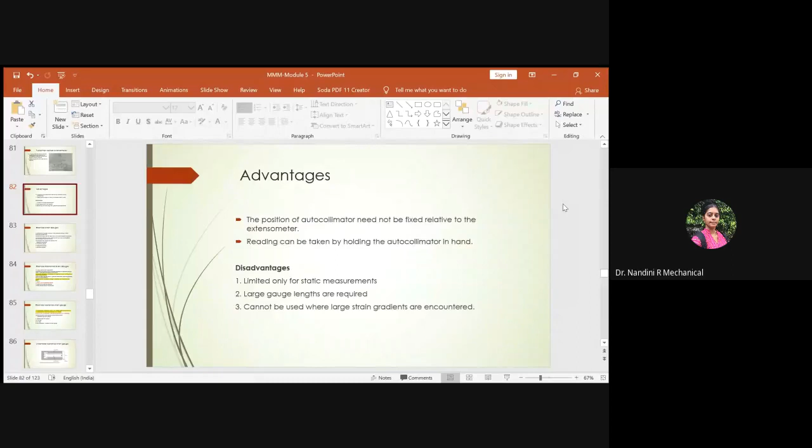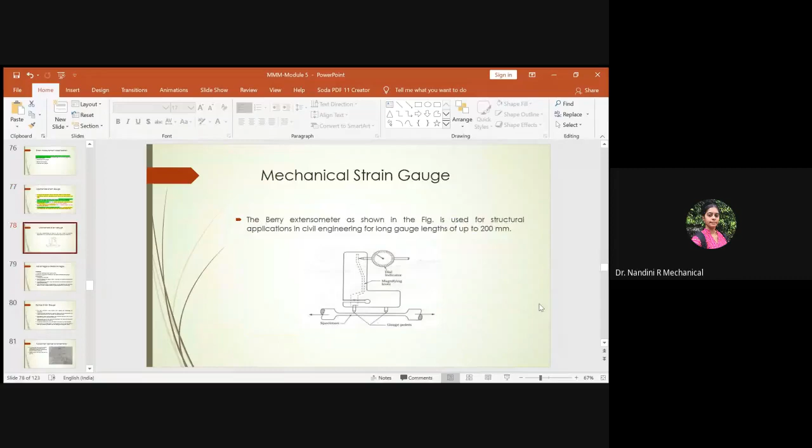In the last session we were dealing with strain measurements. We dealt with different instruments used to measure strain, its classification, and we also went on to electrical strain gauges, its classification based on bonded and unbonded methods. The last part of its classification, piezo-resistive strain gauges, was left out. So today we'll start with the remaining part of the strain measurement section of module five. Related to strain measurements, we have covered what strain is, strain measurements, classifications, advantages and disadvantages.

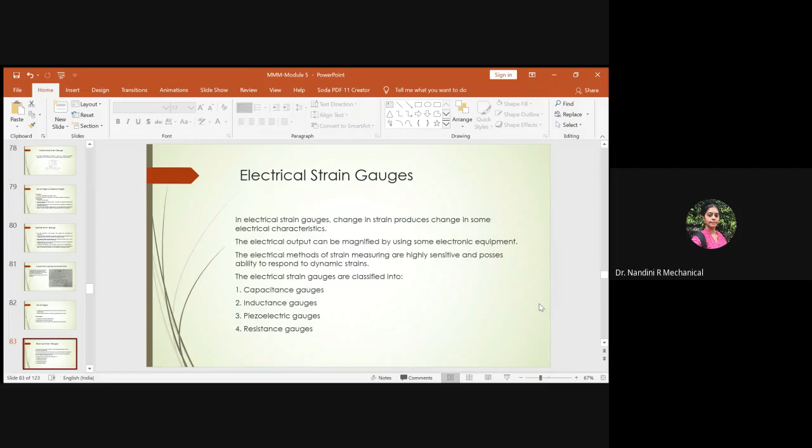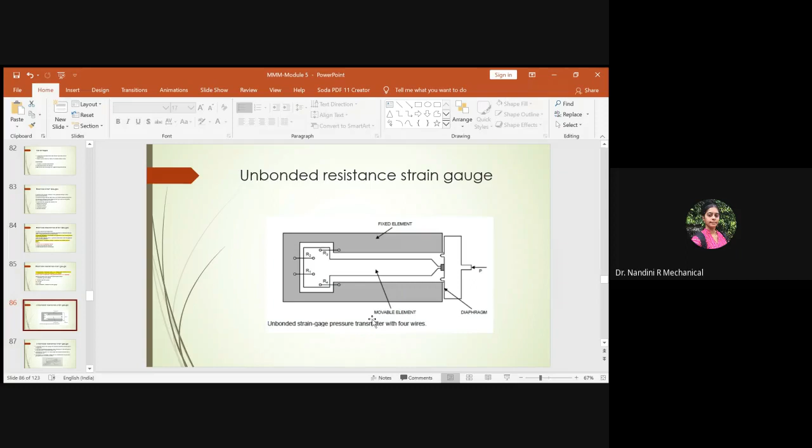Then we dealt specifically with electrical strain gauges, and went on with its classifications. In your syllabus, you have an in-depth description of electrical type resistance strain gauges. So we covered what electrical strain gauges are, how they look, how they operate, and their classifications. We were held up on the last type of classification, which is our semiconductor or piezo-resistive strain gauge. We have dealt with how the structure looks in the unbonded type, how it is operated, and with respect to the bonded type we had two classifications: the wire and the foil method. So that was discussed - this is the foil type which is done.

Now we have to focus on the semiconductor gauge, also called the piezo-resistive strain gauge. If it is piezoelectric, it becomes a dielectric material. If it is piezo-resistive, it comes into the category of semiconductor. Hence the dual name, either semiconductor or piezo-resistive. So piezo-resistive and piezoelectric are both different - they come into two huge classifications, which are semiconductor and dielectric. Here we are just focusing on the piezo-resistive strain gauge, which is also called the semiconductor strain gauge.

These piezo-resistive or semiconductor gauges are usually formed by etching out from single crystals of either silicon or germanium. Both silicon and germanium are semiconductor materials. These are etched out through a single crystal of silicon to get the piezo-resistive strain gauge in the form of thin films. If it is in bulk, with a multi-lattice structure, then it will not be a single crystal - single orientation of the lattice will not be available in that case. Since it is a single structure, we are focusing here on semiconductor gauges of thin film or foil kind of structure.

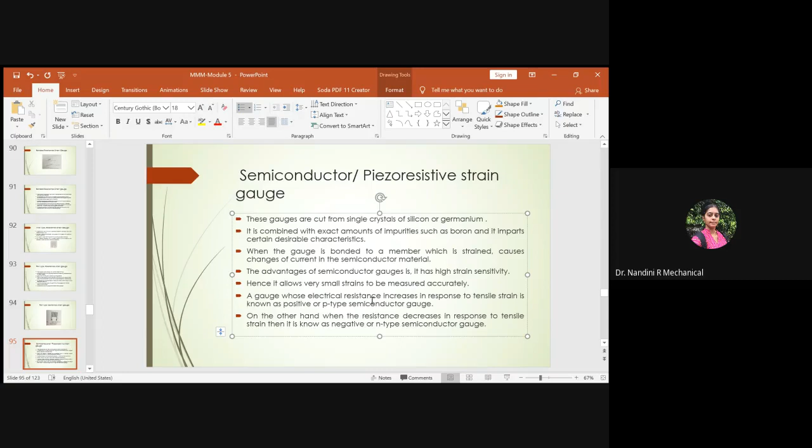There will be some configurations related to the dimensions we have to use. Usually a semiconductor gauge consists of a rectangular filament, as shown in the figure, made by using either silicon or germanium. It will be having 0.05 mm thickness and 0.25 mm width. This is the specification it has to follow for a semiconductor gauge of rectangular filament.

Along with it, the length of the semiconductor gauge can vary from 1.5 to 12 mm, based on the requirement and functionality characteristics. You can select the semiconductor strain gauge of different lengths as per the requirement.

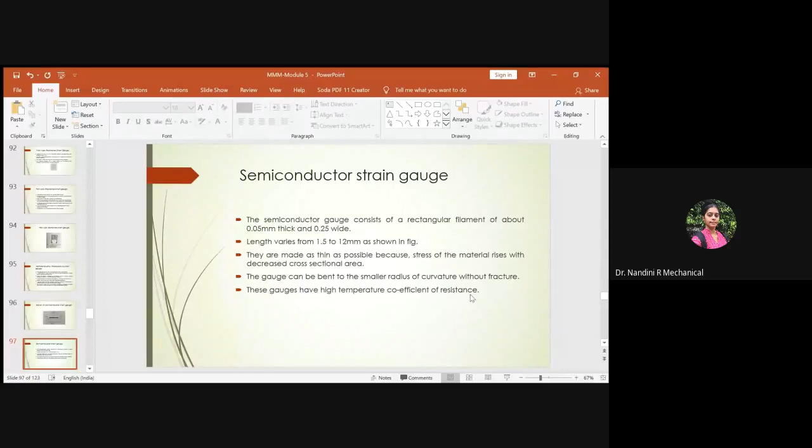Due to this thin thickness, the gauge can be bent to a smaller radius of curvature without fracture. These semiconducting materials are flexible and can be bent to the smallest radius of curvature without fracture because they are not brittle in nature. This is one characteristic of a semiconducting strain gauge. Also, these gauges are very suitable for high temperature coefficient of resistance measurement. So these are the important characteristics of a semiconductor strain gauge and how it is operated.

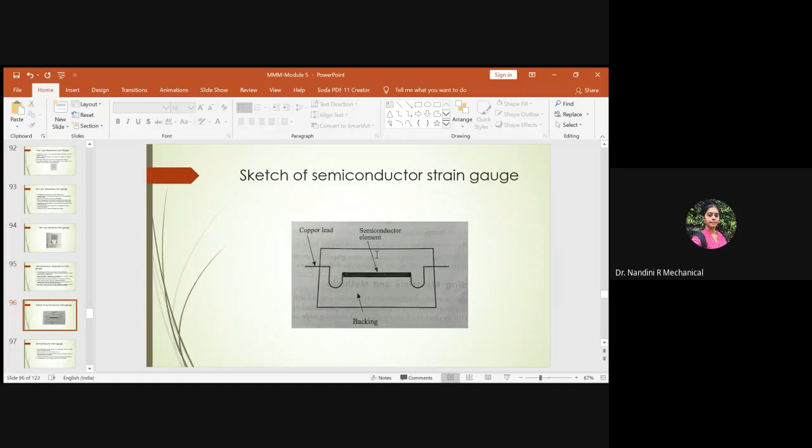Apart from that, there are a few disadvantages to speak about. The first one is the output of the gauge is non-linear with strain, meaning the output you get from the gauge has a non-linear characteristic curve. The response for the given strain in the output electrical signal does not vary linearly; it is non-linear, and could even be exponential. It depends on how the output is revealed for the given input strain. This is one disadvantage, that it is not linearly variable.

And a second disadvantage is that the strain sensitivity is dependent on temperature.

You cannot say the sensitivity of the strain gauge at room temperature will be the same as the sensitivity as temperature increases, because it directly depends upon the external temperature where the device is kept. Hence the strain factor is not an independent variable; it is a dependent variable in semiconductor strain gauges. This is one drawback, because you should be aware of the room temperature and the temperature enhancement, as the strain varies with temperature increase. So this is one of the disadvantages.

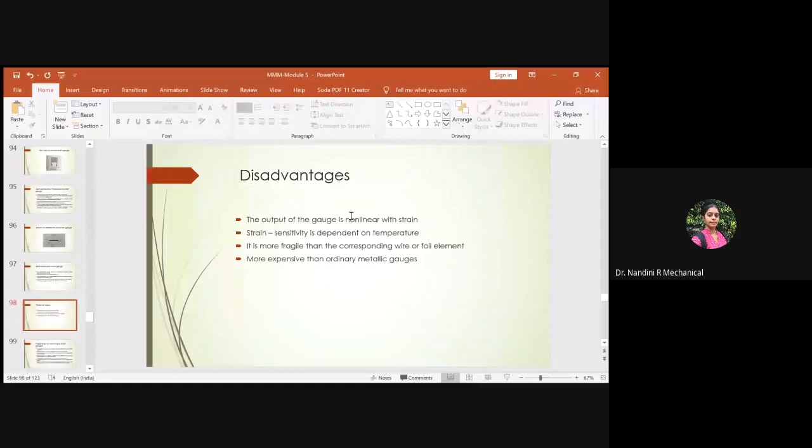After knowing the concept of semiconductor strain gauges, you should understand how preparation and mounting of a strain gauge actually takes place. What are the steps to be followed? We have a few steps, and one has to strictly follow and abide by the rules and regulations of the procedure so that you get a well packaged strain gauge device.

The first step is that the surface on which the strain gauge has to be mounted should be cleaned properly. The strain gauge would be embedded on a movable platform, or embedded on a foil, or embedded on wire, as you have studied with the wire or foil method. So the surface on which the strain gauge has to be embedded or mounted has to be cleaned properly.

Second, if there are any traces of grease or oil on the surface, it should be cleaned using acetone. This helps clear any grease, oil, or impurities present on the surface where the strain gauge has to be mounted, because it should not create voids or impurities embedded between the surface and the strain gauge. If that happens, proper adhesion or bonding will not take place. So it must be cleaned using acetone.

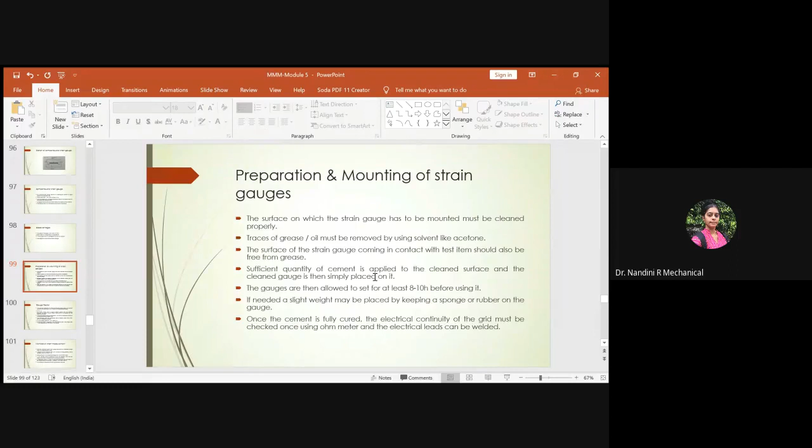So then you should come to know what is meant by gauge factor. We studied this in depth in the theory part of our strain gauge experiment, around a 1.5 hour class where I explained all the concepts related to it in brief. This is just a brushing up in the fifth module, but let us still focus on the gauge factor and what it means.

I have already told you that the change in resistance to the change in length provides us the gauge factor. The electrical resistance of a metallic conductor usually varies directly with respect to its resistivity and length, but it is inversely proportional to the cross-sectional area. So we have the equation: electrical resistance equals rho L by A, where rho is the resistivity factor, L is the length, and A is the cross-sectional area of the metallic conductor being used.

To measure electrical resistance, we always use a metallic conductor. In the metallic conductor, what is the resistivity factor? What is the length of the conducting material we are using, and what is its cross-sectional area? Based on these parameters, we evaluate the electrical resistance of the given metallic conductor.

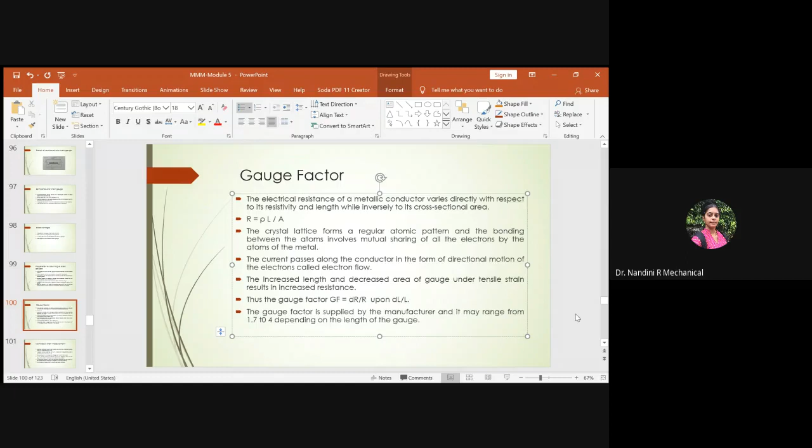This gauge factor we will not compute ourselves; it is supplied by the manufacturer, and usually lies between 1.7 and 4, depending on the length of the gauge being used. We also spoke about the length of the gauge material, which varies from minimum to maximum. Based on this length, the gauge factor keeps varying, and it also purely depends upon the electrical resistance of the metallic conductor used. So based on the variation in electrical resistance and in length of the gauge, the gauge factor is provided by the supplier, and this value mainly depends on the length of the gauge being used. This is about the gauge factor.

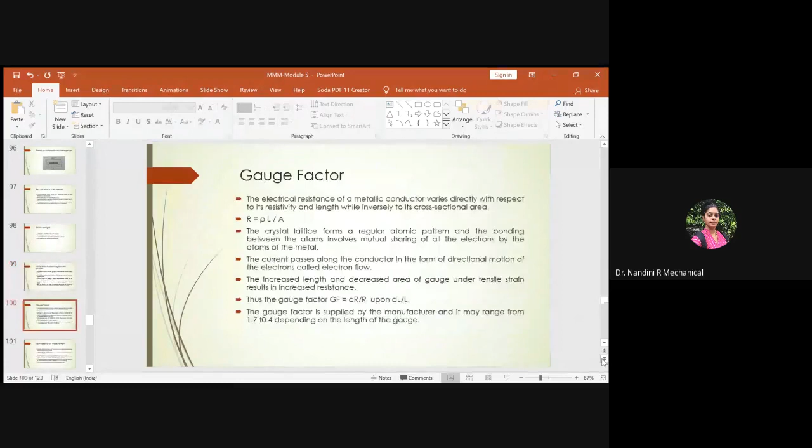Once you are aware of strain gauge preparation methods and the gauge factor, you should also know the methods used to measure strain. Usually we follow two: the null method and the deflection method, which we have already dealt with in our experiments. So we are again telling the same stories.

An electrical resistance type strain gauge usually uses a sensitive Wheatstone bridge circuit for measurement of strain. We have already explained what a Wheatstone bridge circuit is, having four resistor arms, how you balance it at the null position, and how varying one of the resistances gives you the variation measured by the deflection method. So all that has been done.

So the same thing: in order to measure strain, we use a Wheatstone bridge circuit, consisting of four resistive arms with a source of energy. These resistive arms are connected to a battery and a meter to show the readings, as shown in the figure you have already seen in the sketch, where four resisting arms are connected to a meter with a source of energy, our battery, and current flows through the resistor arms.

For balancing, we will balance and get the null position. The basic principle of the bridge can be divided into 2 categories: one is the null method, another is the deflection method.

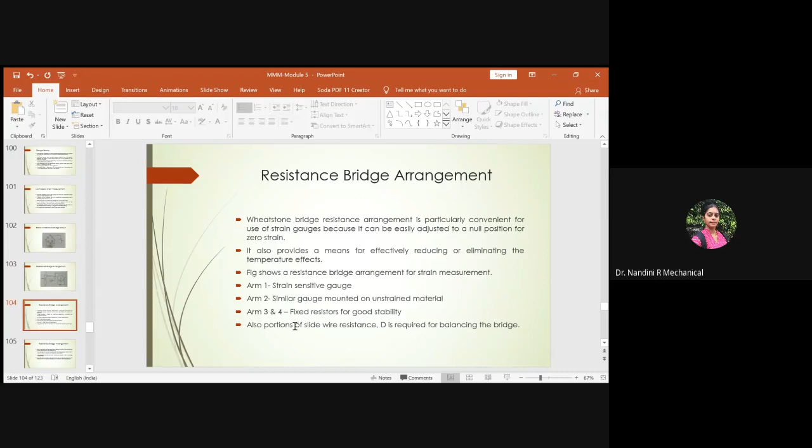In case of the deflection method, continuous readings are taken from one change of strain to another without rebalancing. In this resistance bridge arrangement, we won't keep balancing at every stage, because due to the strained and unstrained arms there will be variation in values and it will not be balanced. As a result, we go on with the deflection method and take the readings. This is convenient compared to the other method, but it is less accurate since the bridge output tends to non-linearity, so the strain obtained is not varied linearly.

The output we get is a non-linear variation with respect to the strain, and as a result, it won't be very accurate readings. But it is more convenient because every time there is no need of balancing it, hence it is called a convenient method. Since it cannot give linearly variable output signals, it is not very accurate, and as a result, as the strain increases or decreases, it keeps on varying depending upon the non-linearity factors associated with this kind of bridge.

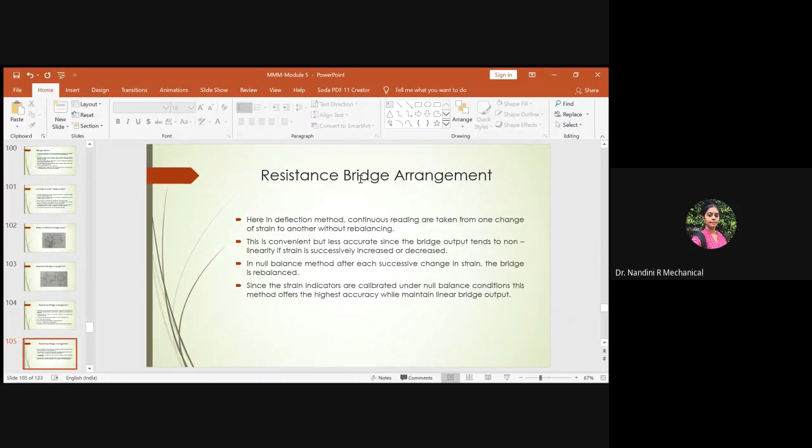So that's what I told you. In resistance bridge arrangement, you have two arms for the resistors, one for the strained strain gauge and the other for the unstrained strain gauge. Due to the strained and unstrained strain gauges, you will not have a null position, and hence you take the readings of the variations in the indicator without balancing. This is the deflection method.

Similarly, if you want to opt for null balance under the resistance bridge, you always keep doing the balancing of the bridge before taking the reading, where you get more precise and accurate results which vary linearly. Whereas in the deflection method, you will have a non-linear variation for the strain response. So based on the requirement and the accuracy needed, you can go ahead with either the null method or the deflection method, even under the resistance bridge arrangement.

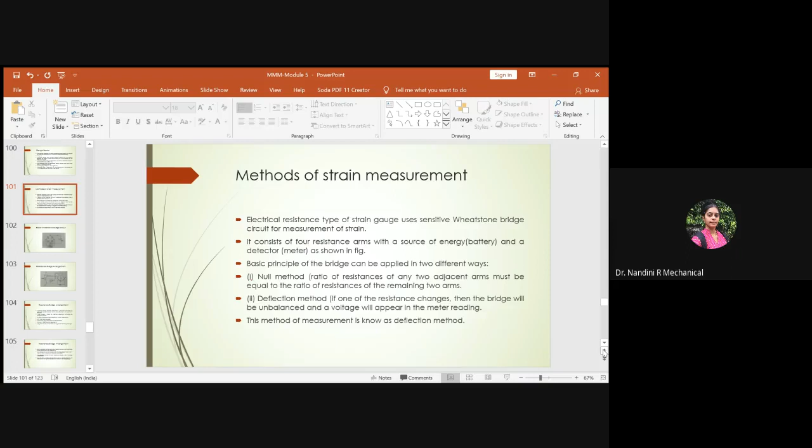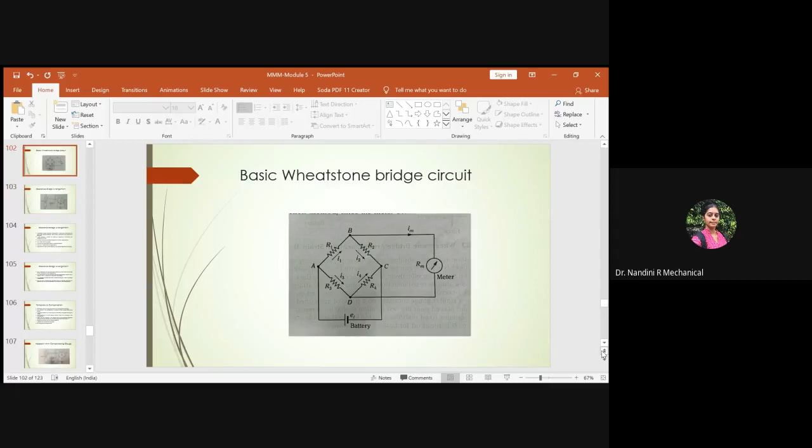In a normal Wheatstone bridge arrangement, you have 4 normal legs of resistors R1, R2, R3, R4, whereas in the resistance bridge arrangement, 2 legs of resistors are removed and replaced with strain gauges, one with strained material and the other with unstrained material. But in both cases, you can measure the output signal under the null method and the deflection method. So if they ask you to explain strain measurement methods, you have to speak about both methods, how it is measured under null condition and deflection condition, along with the sketches you have to draw. So this is about the resistance bridge arrangement and Wheatstone bridge circuit used to measure strain.

And then you should understand what happens in case of temperature compensation, how it varies with respect to temperature parameters.

So now we have studied resistance type strain gauges, and how they are affected with respect to external temperature. One thing to keep in mind: resistance type strain gauges are very sensitive to temperature changes, so any variation in temperature will directly influence the strain gauge readings. There are 3 factors in which it gets varied. The first one is the gauge factor of the strain gauge, which is affected by temperature owing to creep. Due to the creep nature of the conducting material, the temperature penetrates into the material by the formation of creep, and due to that, there will be variation in the strain and variation in the gauge factor measured by the strain gauge.

While explaining the gauge factor, I told you it also gets affected with respect to the external environment, so the strain we are measuring is directly affected by the external environment. It is not independent of temperature, as I told you at that time. The same has been replicated here in temperature compensation.

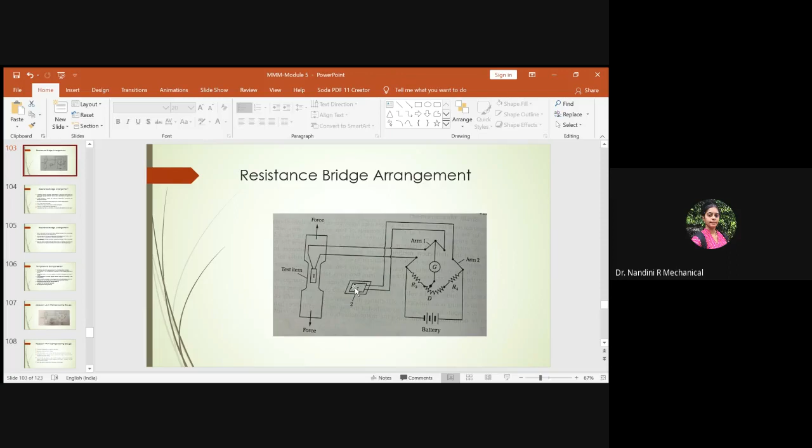Any change in the resistance of gauge 1 due to temperature change is cancelled by a similar change in the resistance of gauge 2, because both have the same value, so it gets cancelled and becomes null, and the bridge remains balanced. As a result, we always use a compensation gauge made of the same material. In the previous regular bridge arrangement, the material was different—one was unstrained material and the other was the material to be tested. So both materials were different, and there was no chance for these two to get balanced and make the bridge zero.

But in case of temperature compensation, to overcome the effect of temperature, we now use two gauges of the same material—one for compensation. So any change you get in the test gauge, you will have the same change in resistance here, so both get nullified, the bridge gets balanced, and the compensation of the temperature effect can be overcome. This is the reason why we use a compensation gauge in the adjacent arm gauge pattern.

As a result, the output is unaffected by the change in temperature. If you do not add a compensation gauge, the strain you measure will keep varying with respect to the external temperature where the device is kept. If it is at room temperature, you will get one strain value. If the temperature has been increasing in the external environment, it keeps on varying, so you won't be having a consistent strain value for that particular material.

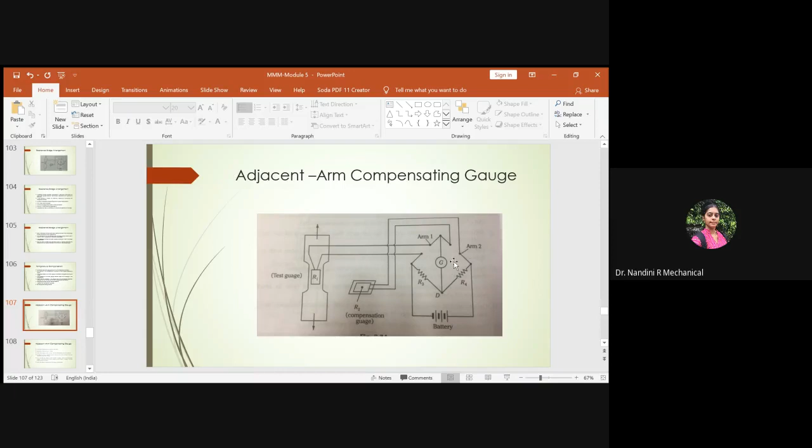So if this has to be overcome, one method is to have a compensating gauge. This compensating gauge will help in nullifying the variations caused by the external environment, and hence the bridge becomes balanced and the variation due to the external environment could be overcome. So this is the first method of how we do temperature compensation.

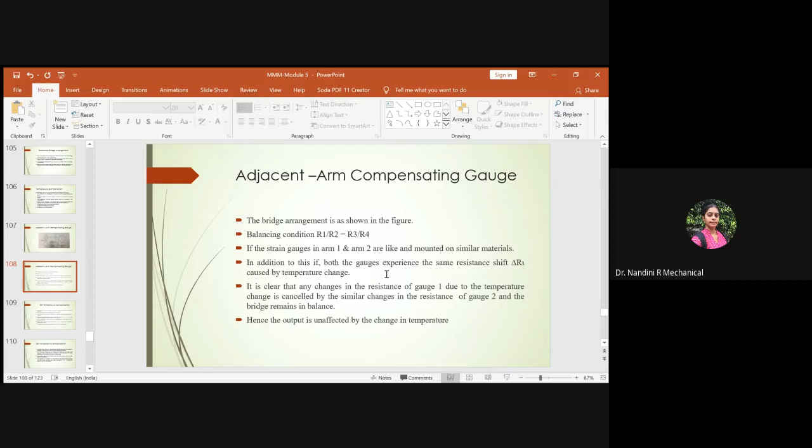What is the next method? The next method is called self-temperature compensation. What happens in self-temperature compensation? This gauge should exhibit zero change of resistance with respect to change of temperature when bonded to a steel base. Suppose you have a steel base as a substrate on which the strain gauge is bonded, in that case it will show a zero value of change in resistance with respect to temperature.

This means there will be no external effect of temperature embedded into the strain value we are going to measure, because we are using a steel base here as a substrate, which is like a foil or a wire. So here we consider a conventional advance gauge bonded to a steel base. Until now, we have studied the bonding of strain gauges either through foil or through wire; we haven't come across a steel base.

So this steel base acts as a good substrate material in order to bond the given strain gauge. This gauge will be well bonded to a steel base in order to overcome the external effect of temperature. Next, you have to understand the coefficient of linear expansion of this alloy, because you will be embedding the gauge bonded with a steel base. So this is a combination of alloy.

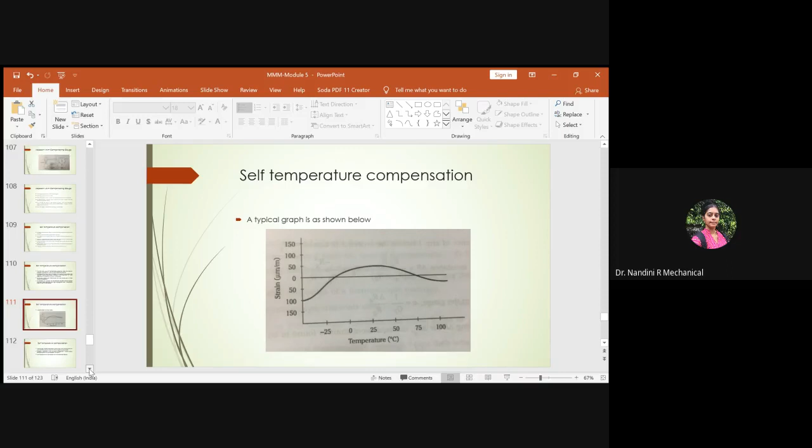When you do hands-on work, you will be more familiar. So this is about the compensation method. From the next class, we will start with temperature measurements, which is the last part of module 5. If we cover that for around 3 to 4 hours, we can complete our syllabus.

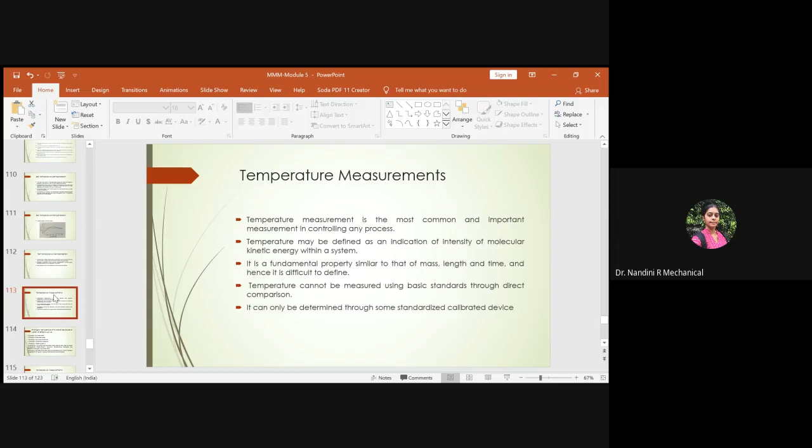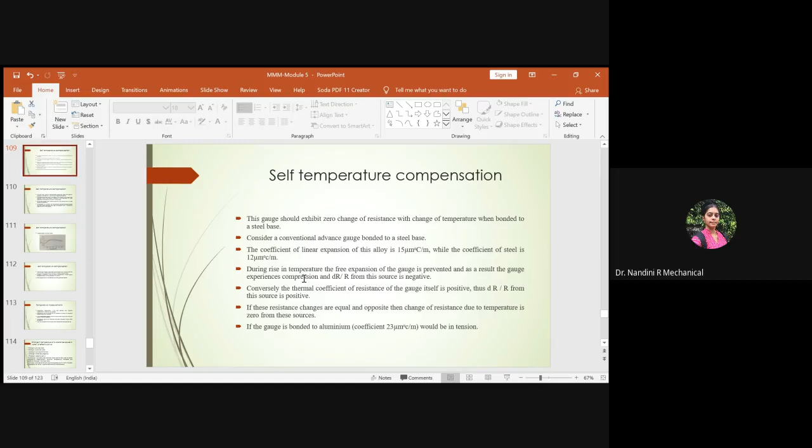So that's the self-temperature compensation, which I have already explained. The other method was arm compensation. Under temperature compensation, we have two methods: adjacent arm compensation and self-temperature compensation. You should explain both. Before explaining, you should state the reason for temperature compensation, why it is needed, then start with a neat diagram and explain both methods.

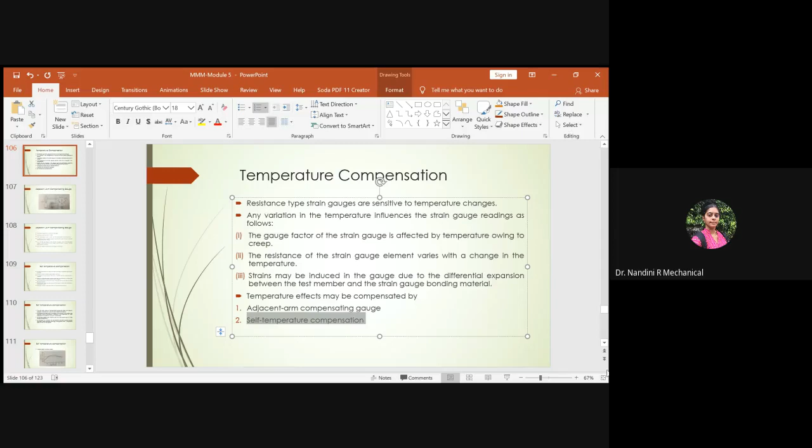This ends the half section of your module 5. In the next class, we start with temperature measurements.